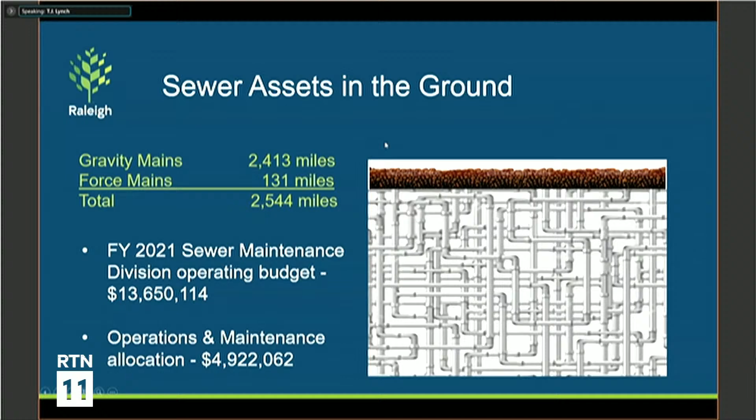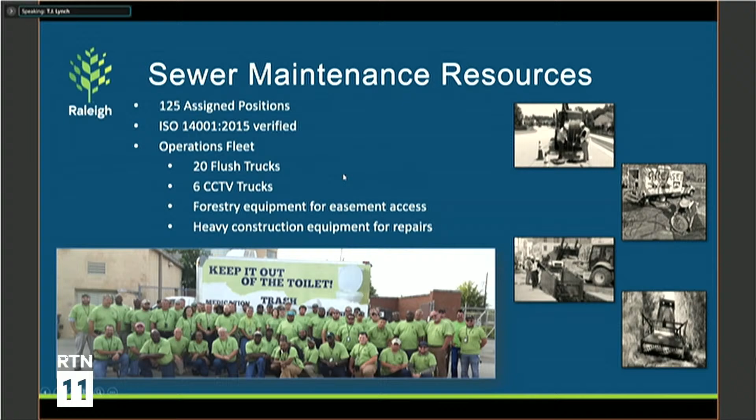Now, the collection system does have federal and state requirements in terms of how it's operated, how it's maintained, and the performance of that system. The EPA, from the federal perspective, has a zero tolerance policy for sanitary sewer overflows.

We were audited against that policy in 2011. That was a very thorough multi-day audit that ultimately resulted in a notice of violation, but no consent order or consent decree was issued from the EPA, unlike many of our peers. Very fortunate for that. But EPA has followed up with us twice since 2011 to make sure we were following the plan we laid out for them. We showed them our pipe replacement schedule and our capital program, and that was sufficient for them not to issue a consent order or decree.

And they've checked in twice to make sure we've followed the schedule we've laid out, and we have. The notice of violation was simply issued because our system has experienced SSOs. Anytime the EPA does an audit, if you've had an SSO, that is a violation of the rules, and a notice was issued for that.

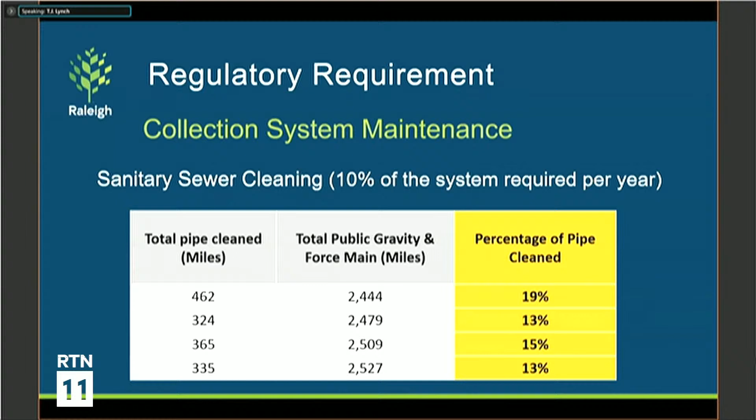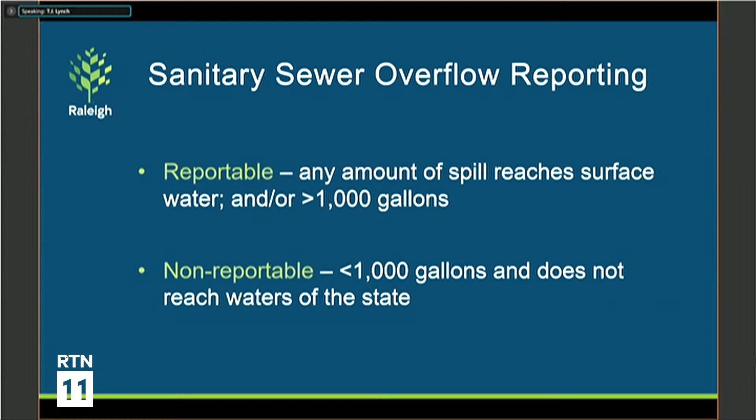We also track total reportable and total non-reportable overflows. If you look at the data over 10 years or more, you will see that downward trend. In the last 3 years, we have seen a bit of an uptick in our overflows and have plans for how we will address those overflows, which I will talk about.

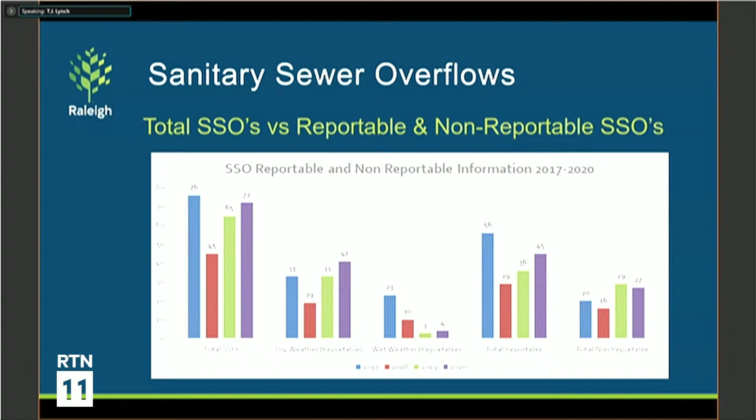So even more granular, SSOs by cause. It's easy to think about an overflow occurring and just not really knowing why. But it's important to us in our investigation to determine what the cause of failure was, because that changes how we keep it from happening again. It really goes to how we prevent.

Debris is a category that includes flushed wipes, as we like to call them. Wipes are generally an issue for us. Those wipes tend to adhere to the pipe, especially if there's a grease accumulation in the pipe. They'll adhere to roots, and anytime you have adherence within the pipe, you're going to get some buildup of material that ultimately will cause a backup and an overflow.

Grease is still one of our greatest causes of overflows. It's a customer behavior issue that we try to address with education. We'll continue to try to do that and are looking for new ways to do that all the time.

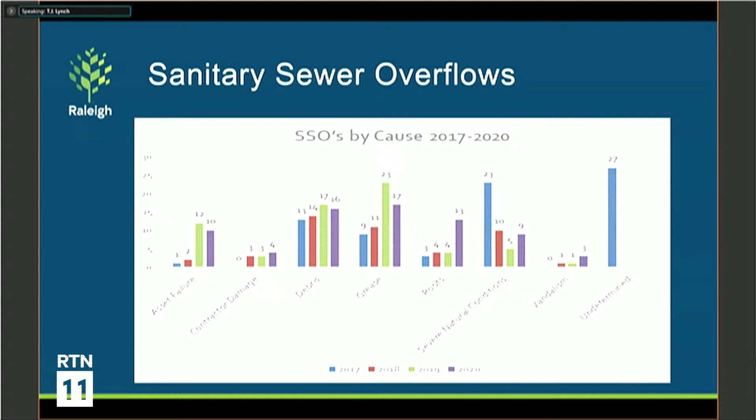Occasionally, we've had to deal with some vandalism. Next slide, please.

Now, we've talked about numbers of SSOs, and although it's really important to count the number of SSOs that occur, when you think about environmental impact, it's really about the volume of wastewater that gets into the stream or the volume of sewer. I think historically our volumes have been fairly low for a system our size. There is one outlier: 2018. That was a significant year for rain events. If you remember, Hurricane Florence was in 2018, as well as that late fall storm.

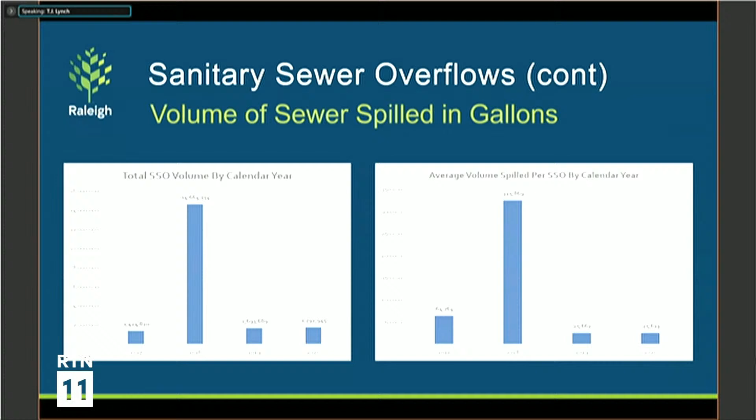There are a number of factors to consider that impact the performance of the system, and staff resources are a big one. If we don't have the people to run the equipment and do the work, that leaves a gap in productivity. In the sewer maintenance division, we're averaging about a 12% vacancy rate, which has had some impact on the amount of crews we can put in the field. COVID-19 has certainly had an impact, especially in the early months, when we completely withdrew from preventive maintenance for a period of time.

We needed to better understand the virus and how we could safely put our staff back out there. There were rumors and information out there that even the mist that comes off of the cleaning operation could have COVID in it and cause impacts to our staff. And we didn't want to put them in that position until we had a much better idea how we could protect them. So we have ratcheted that back up, but it definitely had an impact on our productivity in terms of flushing the system or cleaning the system.

Aging infrastructure is always an issue in our system. We'll always be battling that. And so, when you have aging infrastructure, if it's severely aged, it's on the edge of failure. And so we have had instances where we've had some major failures that have led to overflows.

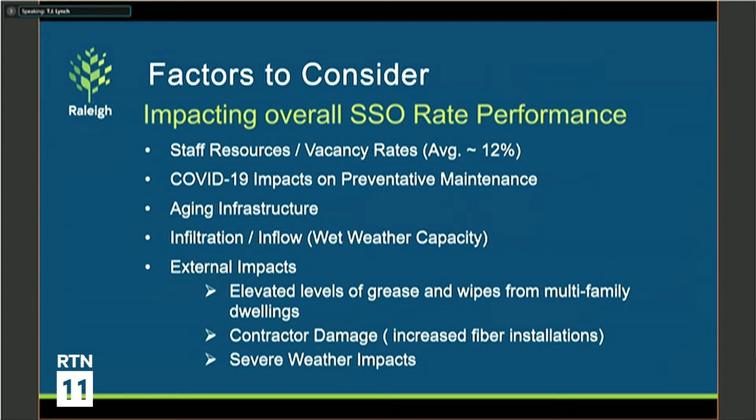And so within the sewer maintenance division, we're constantly looking for ways to improve. It is part of our culture. It is part of the ISO 14001 management system. And so, one of the ways that we can do that is by stopping an overflow as fast as we can. We have a reward system for customers who call. Anybody who sees an SSO occurring can call that in and actually get a reward for reporting that SSO. But as soon as we get the word about an SSO, we're on our way, and then we have a procedure for when we get there.

Our staff are trained to stop, contain, collect, and restore. The whole goal here is to minimize environmental impact. The stop part is the first thing we're going to be doing. Actually, we're doing some of these activities in parallel, but we're stopping the overflow first. We are building dams generally downstream to stop the water flow so that we can collect that wastewater and pump it back into the collection system. And then we restore that area. We'll wash down the creeks. We seed if we need to. We just do whatever we have to do to try to restore that environment to its natural state. And our staff are well trained on that and do a great job at it.

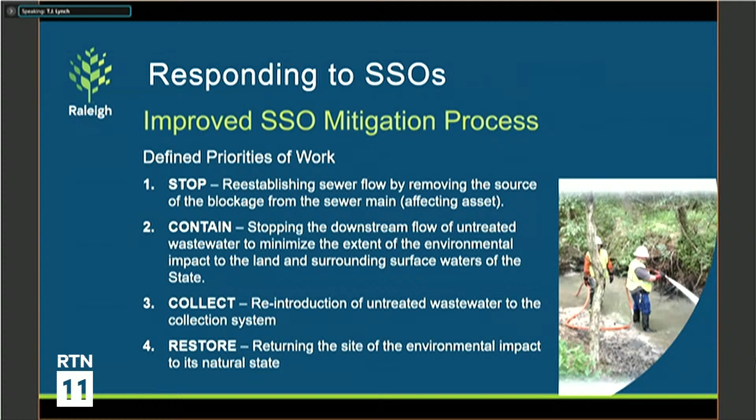Next slide, please. But the work doesn't stop there after an SSO. There are certainly the regulatory requirements that we have to engage. There's notification processes where we have to report this overflow to the Department of Environmental Quality, Division of Water Resources. They need to know about this within 24 hours of the spill. And then there's also the formal press release for anything over 1,000 gallons and a formal public advertisement in a newspaper for anything over 15,000 gallons. Those are the regulatory activities that will generally follow, but there are also additional activities.

Our staff goes into investigator mode, and they will try to find the cause of the overflow. And then depending on what that cause was, they'll address it. For example, if it's found to be a grease-related spill, they'll go upstream and distribute educational materials to any of the upstream dwellings. And we'll also look for commercial users. So, are there restaurants on this line? Do we need to look at their grease traps? Do we need to do additional investigation there to find out how this grease got into the system and how we can prevent it again? CCTV is also a very powerful tool. CCTV is basically a camera that we're able to put inside the pipe.

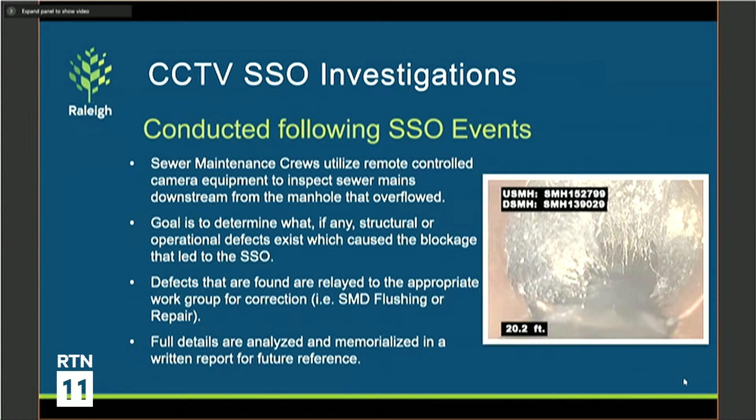We do a lot of documentation, and we create a lot of data, and we use that data to look for systemic problems. Next slide. Also, if we have had an SSO at a location multiple times, really it only takes a second time. If we have an SSO at the same place out of the same manhole the second time, and it doesn't have to be within a short period of time, it can be within a few years, we're going to add that spot to what we call our hotspot management list.

There are over 400 of those locations within our service area, and as you can see, the vast majority of those are in Raleigh for a lot of reasons. Raleigh has generally an older system, certainly more mature trees over the system, around the system. That ultimately creates this. Also, more grease generators of food. There's more restaurants. There's just more people, and all of that ultimately leads to the factors that cause SSOs.

You can see of our hotspots what the general causes are. Grease is by far the largest root cause, if you will, of the hotspots, with roots being a close second. And then adverse weather. We've had some areas where we've had some capacity issues, and when we have a large rain event, we know that we need to go to those places because we're likely to have problems there.

And the debris is a growing one. It's the flushed wipes. That's been a growing problem in our system, and that's actually being seen nationally. So there's a lot of work being done in that area, and we're keeping tabs on what we can do there to address those better. Next slide.

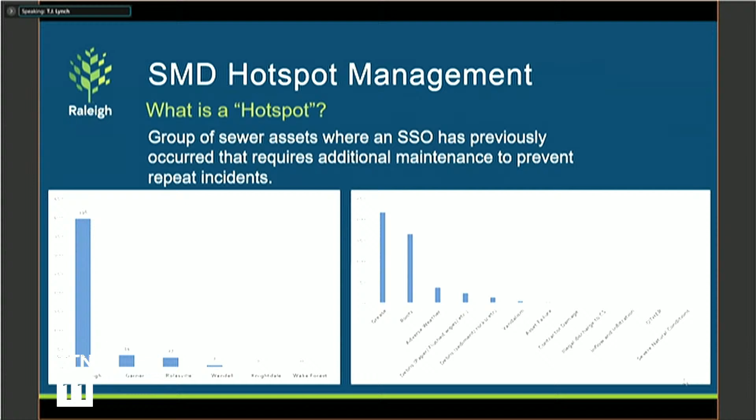Now, to put that 1.59 into perspective, what the EPA is generally looking for are utilities that have an SSO rate higher than 2.0. They told us that during our audits, and I've heard that from them since. 2.0 is kind of that trigger mark where they will start to look at you more closely, if you will. If you're performing under 2.0, I think they believe that you're doing a pretty good job. And I believe that we're doing a pretty good job. Certainly, there's always room for improvement. Next slide, please.

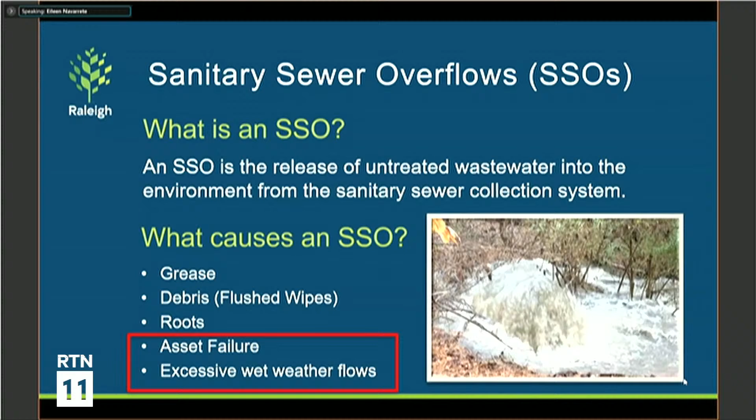Thanks, TJ. So I want to start by taking us back to one of TJ's first slides where he talked about what causes an SSO. And you saw his presentation was really focused on grease and debris and roots. And I'm going to dive over the next few minutes a little further into asset failures as well as excessive wet weather flows. So the first thing I want to talk about are SSOs caused by failures in one of our assets. And what kind of assets am I talking about? Essentially, I'm talking about some of our 2,500 miles of sanitary sewer pipe or anything inside one of our approximately 120 wastewater pump stations as well.

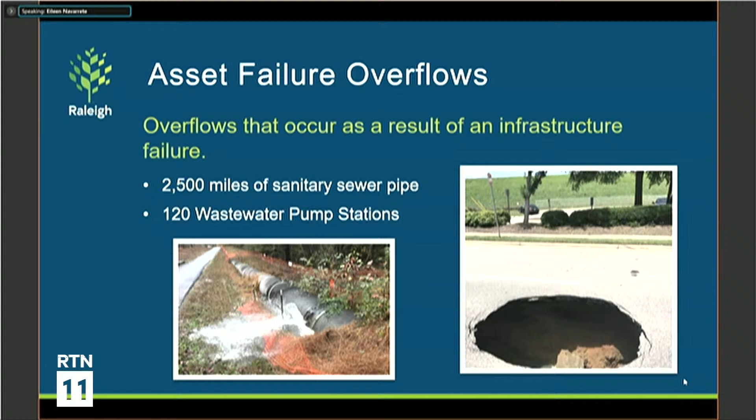The photos that you see on this slide are failures that occurred in our system. The first is along Walnut Creek in 2018, and I believe that is actually during that storm that TJ referenced from the fall of 2018, where we had a whole lot of overflows. This is along Walnut Creek, and then the photo on the right is when Millbrook Road failed in 2016 adjacent to Shelley Lake. The failure of the pipe ultimately caused a sinkhole in Millbrook Road that caused a shutdown of Millbrook Road and was fairly disruptive. Both of these assets are now part of active capital projects. And I'm sure this probably goes without saying, but emergency fixes are far more costly to the utility than proactive rehabilitation and replacement.

So the way we address asset failures is through our asset management program. And the goal of the asset management program is to plan the right level of infrastructure investment at the right time to maintain reliable service. So we need to avoid failures for our critical assets, but we also don't want to replace our infrastructure when it still has a number of years of life left in it. So it's really about striking that balance.

And to best strike that balance, we have to understand our infrastructure. So we need to understand how old it is, what material is it, what are its operating conditions, have there already been failures on this piece of infrastructure or similar types of infrastructure.

One of the most important things on the sewer side of the house to think about is the collection system is a much more harsh environment than, say, a water distribution system. The sewer gases that are generated in the system are much more likely to cause corrosion and issues, and we don't get the same life cycle out of our collection system infrastructure that we do out of the water distribution system. So we have to be mindful of what materials we use and what conditions we create in the system.

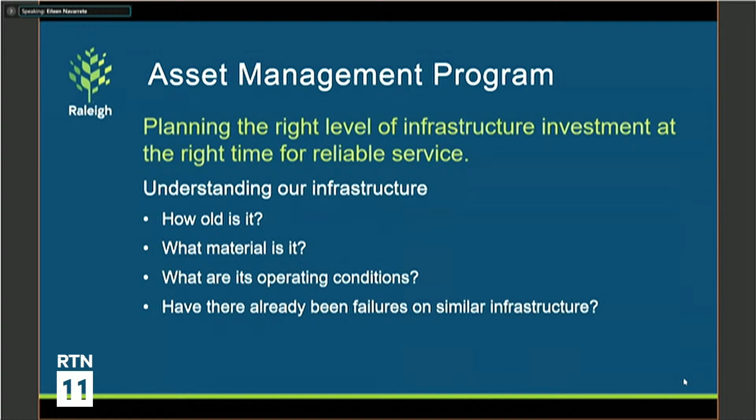So we're going to talk a little bit more about that coming up, but first I want to talk about what we do to best understand our infrastructure. So TJ had lots of graphs. I'm going to try lots of pictures in my portion of the presentation. So let's talk about condition assessment for a moment. Condition assessment is critical for us.

And one of the great things about our sewer system, for a sewer system that's as large as ours, we don't have a lot of pressurized main. Since most of the system is gravity, it means we can put a camera inside it and physically set our eyes on the inside of the pipe and learn how it's behaving and be able to physically see what the condition of our system is.

And so one of the things that I'm going to talk about today is concrete pipe and concrete infrastructure, because we've had a fair amount of it installed in our system, particularly in the 70s, the 80s, and the 90s. And the vast majority of our significant asset failures on the sewer side of the house occur as a result of some type of concrete failure. So let's talk about these photos.

The photo on the left, I guess the first thing I should say is nobody got hurt. But that is a photo of our system where during a construction project, a contractor, after being told not to run the equipment over the compromised sewer line, rode his equipment over the compromised sewer line, and the result was a collapse. And that sewer line is particularly shallow. That runs along the north bank of Crabtree Creek. So this was part of the project to rehab that pipe. This is, I think, 2012 that this happened.

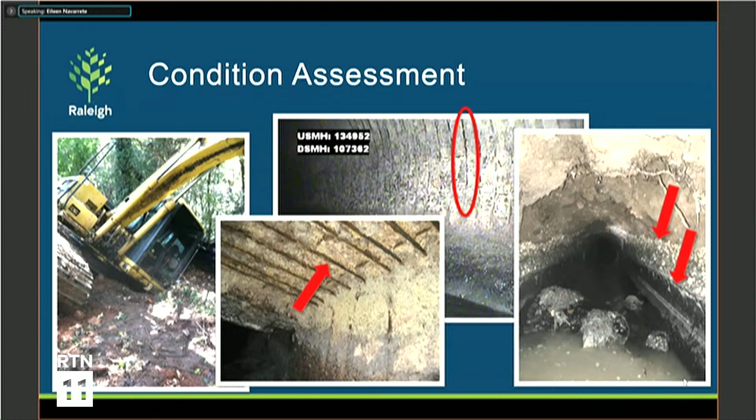Prior to 2014, we didn't have an asset management program to do this type of proactive condition assessment work that we're now doing. Since then, with support from council for CIP, we've been able to invest in condition assessment work and avoid a number of SSOs as a result. Much of the work in the capital program now, many of the pipes we're replacing or rehabilitating, is much more proactive than reactive.

Is it a small pipe in a residential street that's unlikely to lead to a reportable SSO? Or is it a large pipe running adjacent to Crabtree Creek, Walnut Creek, or the Neuse River, where a failure will almost certainly lead to a reportable SSO? This information is really important in making decisions on how to proceed with our capital program.

We're going to talk some more about some of the asset management projects, but I also want to touch on overflows related to wet weather.

We define wet weather overflows as overflows that occur when the collection system is inundated with water as a result of a significant wet weather event. Referencing back to that large storm we had in November 2018, the photo on the left side of this slide is of Marsh Creek, where the creek came up and was well above the collection system, and obviously some rain got into the collection system.

When we have large storms like hurricanes or that storm in 2018, there is a small percent of rainwater that enters our system, no matter how much we try to seal it off. These are the most challenging scenarios for us to prevent. However, through the CIP, we are able to prevent most SSOs during wet weather events.

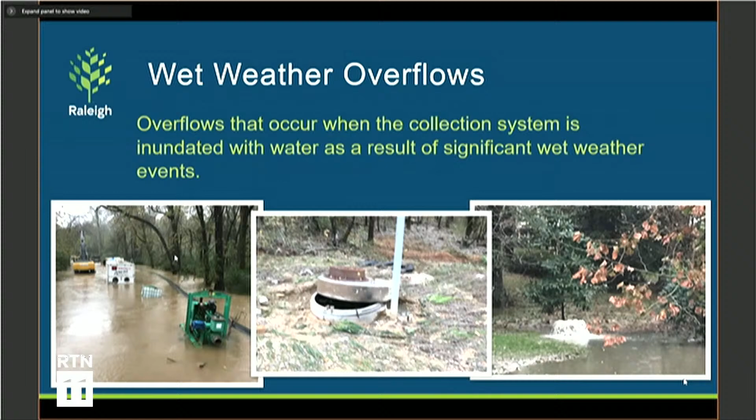So how do we decide when and how to address wet weather capacity issues? Aside from observing SSOs, how do we know that there's even a capacity issue that needs to be addressed? The answer is rooted in the sanitary sewer capacity study. It's essentially the master plan for our sewer collection system, and its main goal is compliance with EPA's zero tolerance policy for SSOs. We do have master plans for all the components of our system, but this is the one that really focuses on those wet weather events.

You heard TJ mention that EPA audited our collection system in 2011 and has checked back in with us multiple times since then, and that we never received a consent order. This capacity study and the projects that come out of it are a lot of the reason that we didn't receive a consent order, because we had a plan for how we were going to address our SSO issues, and we were implementing that plan. This is not a plan that we do once and put on the shelf and never look at again. This plan is something that we're working with all the time to continue addressing issues.

It's updated about every 5 years, and it uses a hydraulic model to assess the system capacity. What's great about our hydraulic model is that it's calibrated by a number of flow monitors in the system. We have permanent flow monitors throughout the system, and then every time we do an update of the capacity study, we install a bunch of temporary flow monitors, so we get a real understanding of how our system behaves under a number of different conditions.

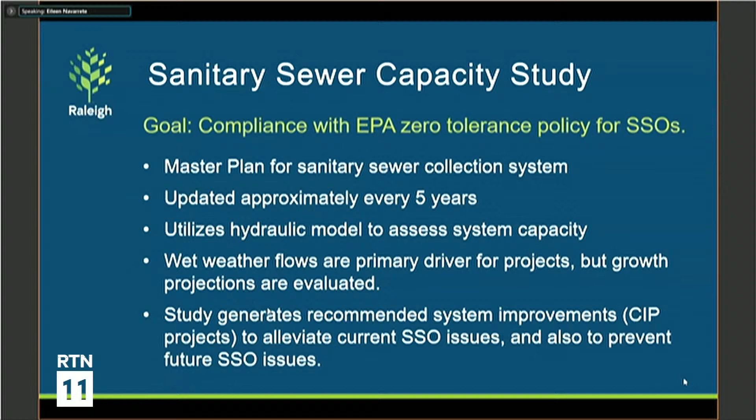And the Walnut Creek lift station had condition issues, which were noticed by our operations staff. So we undertook a project to rehabilitate that, and at the same time, did some expansion work that was going to be needed for wet weather issues.

Around the same time, the Crabtree Creek lift station, which also happens to be of a very similar design because they were designed at the same time as the Walnut Creek lift station, we were getting ready to undertake a wet weather project there and discovered through condition assessment that we had condition issues as well.

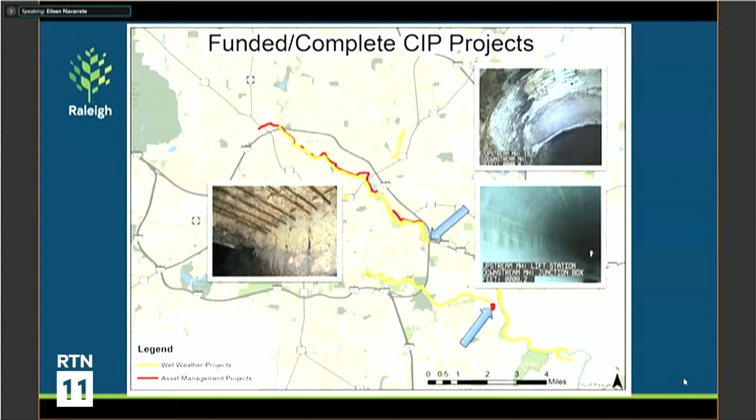Down in the southeast corner of the service area, you have the East Neuse Interceptor, as well as the pump station and force main that convey wastewater to the Neuse River Resource Recovery Facility. This system is going to be the new backbone for the system coming from the Neuse River.

The pump station and force mains are under construction and are due to be completed in about a year. And the pipeline, which will be the largest pipeline in our system, part of it will be 84 inches and part of it will be 96 inches in diameter.

Construction is scheduled to get underway next month on that project. Council recently approved the award of that project to Park Construction.

I didn't want to forget about a couple of the smaller projects that maybe don't carry the price tag in the tens of millions of dollars, but are still important. The project on the top right is the Brentwood Estates Improvements Project, which is just beginning construction now. And the project inside the Beltline is the Upper Pigeon House Interceptor Project that was completed in 2017, addressing sanitary sewer overflow issues with flows coming from the north side of downtown.

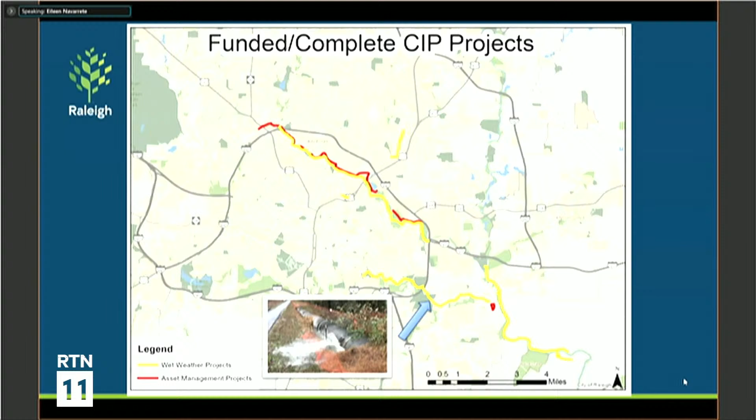The Walnut Creek Basin does have wet weather flow issues, but not as severe as we've seen in Crabtree. It has a very significant asset management component. We've had several failures along those pipes, and we do know that there are condition issues, and those are going to be addressed as part of the wet weather project.

And it wouldn't be an SSO presentation if we didn't discuss Crabtree Creek. And I say that because the vast majority of our overflows over the last 15 years have occurred in the Crabtree Creek Basin, many of which are along Crabtree Creek itself. And there have been a number of projects over the last 8 to 10 years to help alleviate sanitary sewer overflows, and I'm really pleased to share that we're seeing the benefit of those projects already.

They're not complete yet, but because we have those flow monitors in the system, even beyond seeing a reduction in our SSOs, like TJ mentioned, we can see how the system from our flow monitors is behaving differently and responding better to these large wet weather events when they occur.

So there were two large rehab projects that occurred along Crabtree Creek. And then, of course, there's been the construction of the third interceptor along Crabtree Creek from the lift station at 440 and 64 all the way up approaching Glenwood Avenue. That last piece will hopefully be complete this summer.

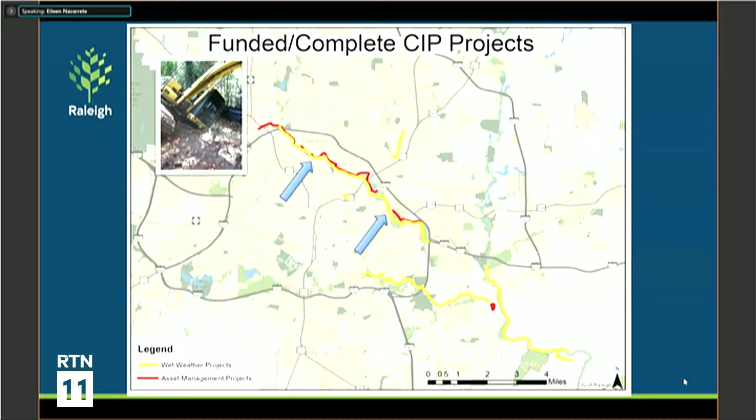Looking towards the future, there's more investment coming and more good things coming. And the great part of this story is this is where we're really starting to see the transition from being reactive to being more proactive.

So turning back to the Crabtree Basin, the arrow on the left side is the Crabtree Valley Interceptor project. That's the next piece of the interceptor along Crabtree Creek. This one happens to go near Crabtree Valley Mall. That project is under design right now and is expected to go to construction in fiscal year 2023.

The arrow in the middle is the Mine Creek Interceptor. That's where we have the failure along Millbrook Road. There's a very significant wet weather component to that project. There have been some spills, but nothing as severe as what we saw for a long time along Crabtree Creek. And so we're working towards construction on that project.

And then also probably getting into construction next year will be the replacement of the Big Branch Interceptor, where we did have a spot where we had that failure, though no SSO with that failure. But there is a wet weather capacity issue in that pipe, and that's the primary driver.

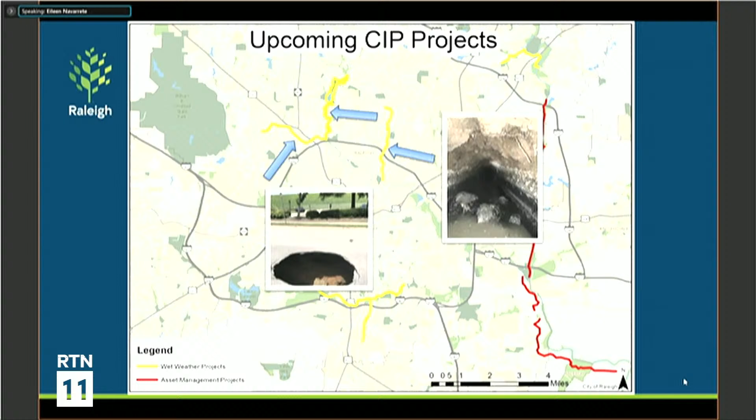Down in the Walnut Creek Basin, we're going to continue working our way upstream to manage wet weather flows. So we're working our way to the west along Walnut Creek, and then also the line that's running north-south there is addressing some wet weather issues along Wildcat Branch.

In the northeast corner of Raleigh, we have two projects along Perry Creek with some wet weather components. Asset management is pretty minor to those two projects.

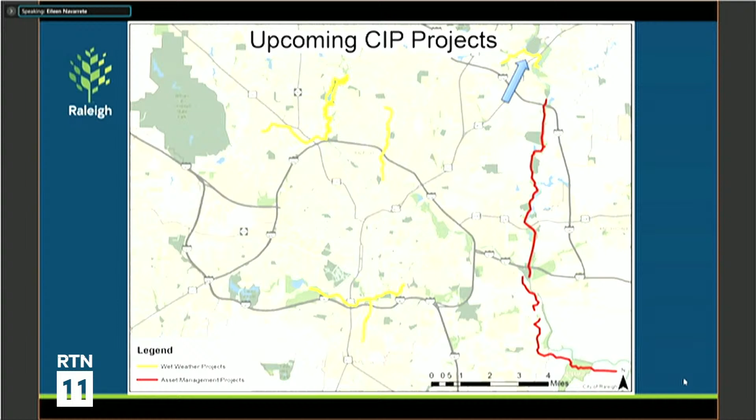And then finally here on the east side of the service area, we've got three really significant projects that are a result of our proactive condition assessment work. So the project to the north is the West Neuse Interceptor project. The project in the middle, we refer to it as the Crabtree Interceptor rehab project.

And then the project to the south is the rehabilitation of our twin 72-inch interceptors that go from our largest lift station to the Neuse River Resource Recovery Facility. So they are a very critical backbone in the system. And all of these issues were discovered during proactive condition assessment.

I feel like I should knock on wood when I say this, but we have not had any failures on those lines. But that picture that you saw earlier, that picture is from the inside of one of those interceptors. So that's our clue that it's time to do something.

So the total investment of these projects represents approximately $250 million.

I also want to be clear that I wanted to highlight a number of projects here, but that this is not exhaustive. And so we haven't talked about any of the small diameter replacement projects, which are replacing some of our clay lines, particularly in some of the older areas of the city. A lot of those lines are not in great shape, but really wanted to just hit some of the highlights as part of this presentation.

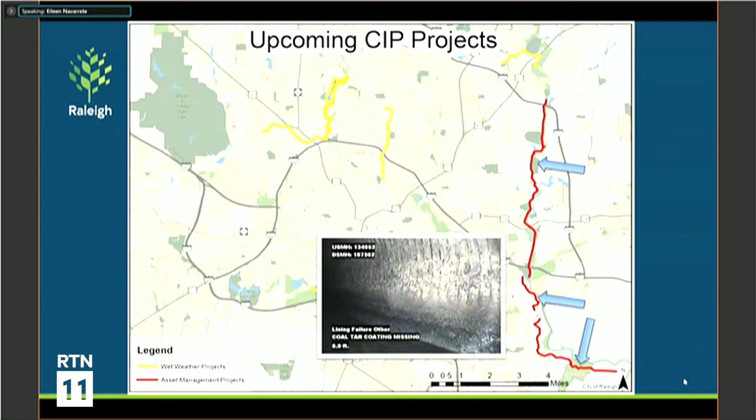So looking to the future, as TJ shared, it is difficult to prevent all sanitary sewer overflows. There is a customer behavior component, which we do try to address through outreach, and there are some opportunities in that arena. And then there are extreme wet weather events that we can't control, but staff feels that continued investments in the operating divisions as well as in the capital improvement program will continue to minimize future SSOs.